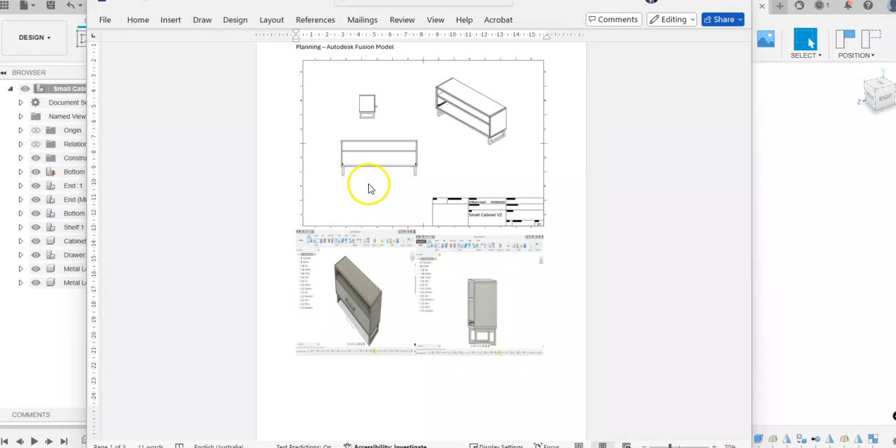This is the same model. You can see it's been rendered out with a shadow and materials, and I've screen clipped this into nice clear images that actually communicate what our design's about.

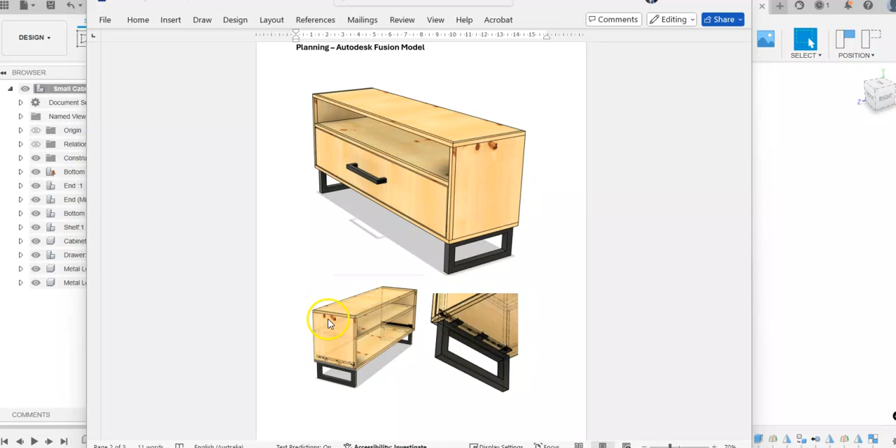The underneath side shows how the legs fitted, and here you can see through the model, like an invisible view which shows all the joinery inside. The technical drawings communicate all the measurements needed, and the exploded view shows the parts view. I've got a few missing here, but we'll go through this together. You can see that communicates much better than initially what's put in the folio.

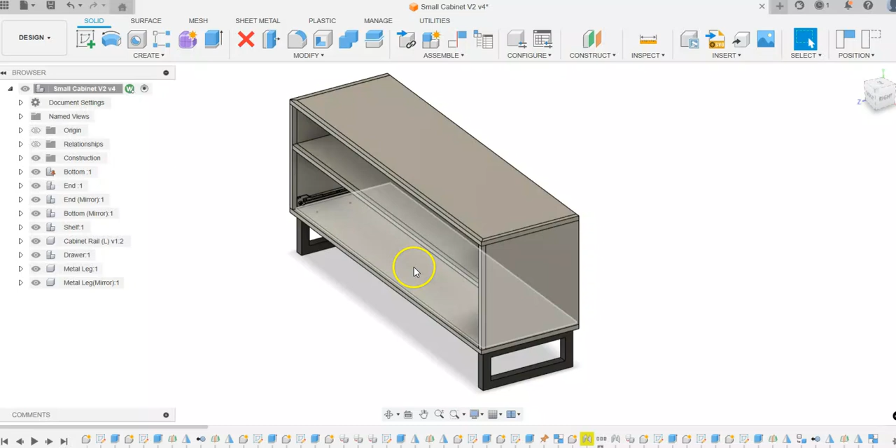So I've opened my project in Fusion, and the first thing I'm going to do is allocate my materials. The natural material that Fusion allocates is steel, so I'm going to highlight everything using Shift and go right-click Material Properties, Physical Materials, and drag my pine over onto the other components.

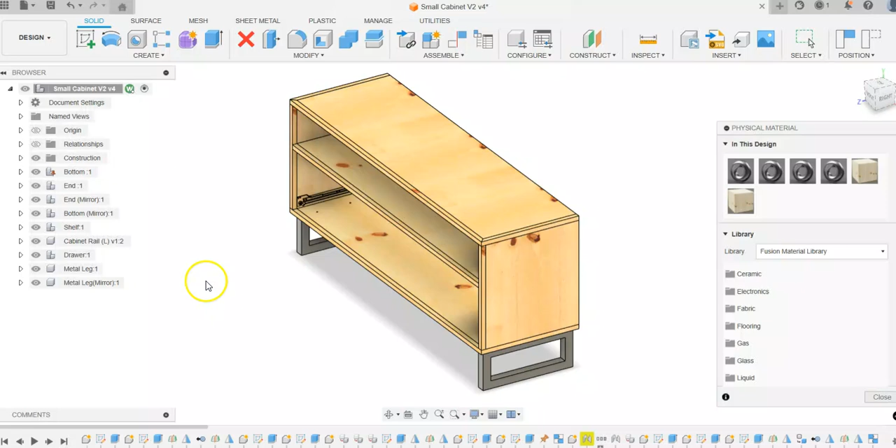I'll just show you that again. We highlight everything we need. If you don't have timber up here, scroll right down to wood and then keep scrolling down to pine, and then click and drag that across to the work.

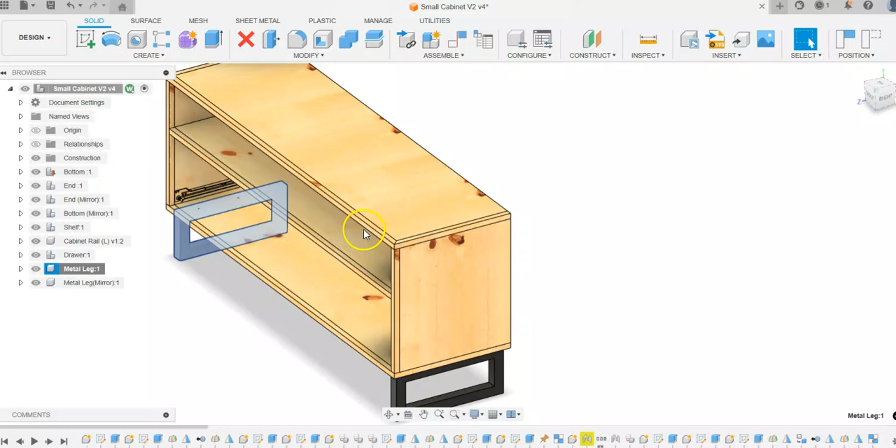Click OK or close to that, and anything that's metal or steel here, we can click on the component and right click, go to appearance, because we might want this to look like a paint finish. So we'll go to paint, glossy, black, and drag that across to the steel components you want.

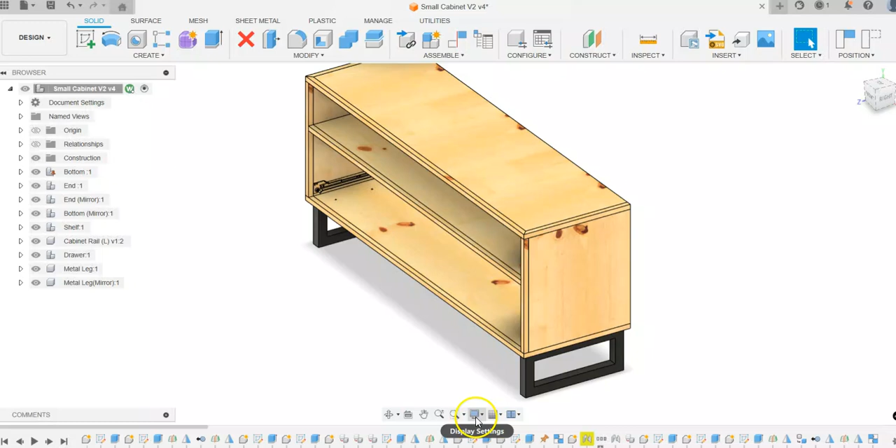I've got draw runners in here, but we're not going to worry about that at the moment. I didn't model this, I got it from a library, but I've just allocated it as timber. Let's not worry about that. The next thing we're going to look at is this display setting down in the bottom.

If I go into camera and change it from orthographic to perspective, you can see that it's a more natural perspective look. That is much better to communicate your style of project.

The other thing you can change is visual styles. You can have a look at this shaded with hidden edges. You can see that's like an invisible see-through kind of look. That's quite nice at communicating the form as well.

If you've got any of these joint markers, that blue one, you can right click on it and go hide, or down here you find which is highlighted, right click and show or hide to remove those markers.

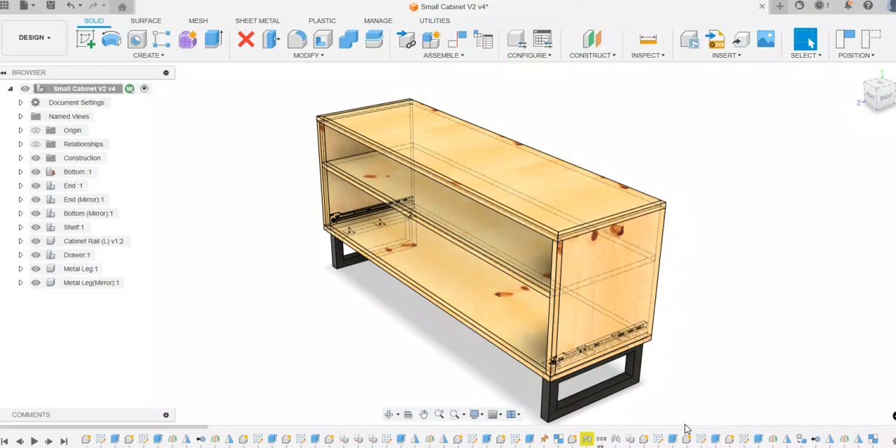On a Windows machine, I click Windows Shift and S, and use my screen clipping tool to screen clip that out. Try and get rid of all this, just have a white background, so zoom to a point where you'll just have a white background. That will look really neat on your project.

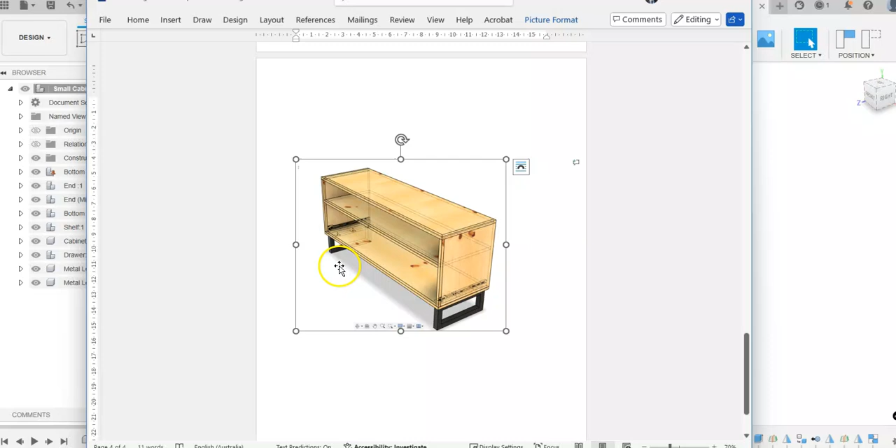So Control or Command V puts your project in. Like I said, get rid of these little icons as well, and make a feature of this, because that is all your hard work that you want someone to assess now. So have it showing the best you possibly can.

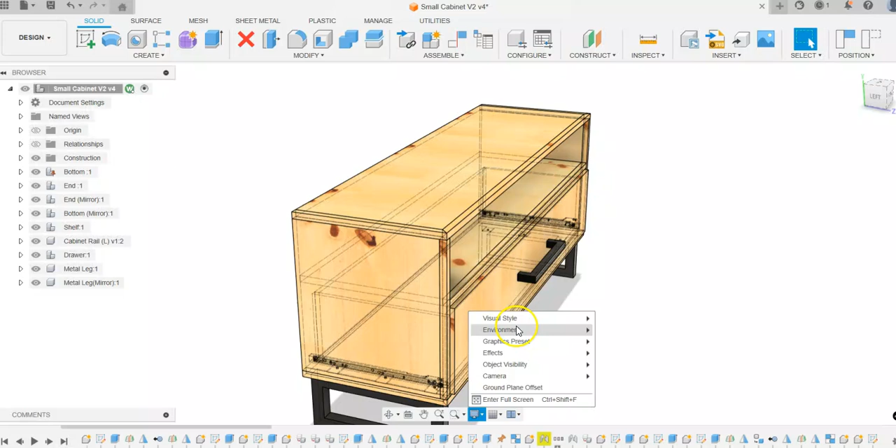I've modelled up a drawer for mine too. Get a few different angles, make sure that it's maybe 4 or 5 of these. I don't really like that form without the outside line, but in visual styles, this one here and this one here, just with the visible edges, that looks really nice.

Let's move now to technical drawings. We're going to go up here and go New File and New Drawing from Design. This normally is a little bit laggy, so be patient with your computer.

Make sure you've saved your work. Give it a good time just to even do it on a reset when you first open the software. Mine was pretty quick today.

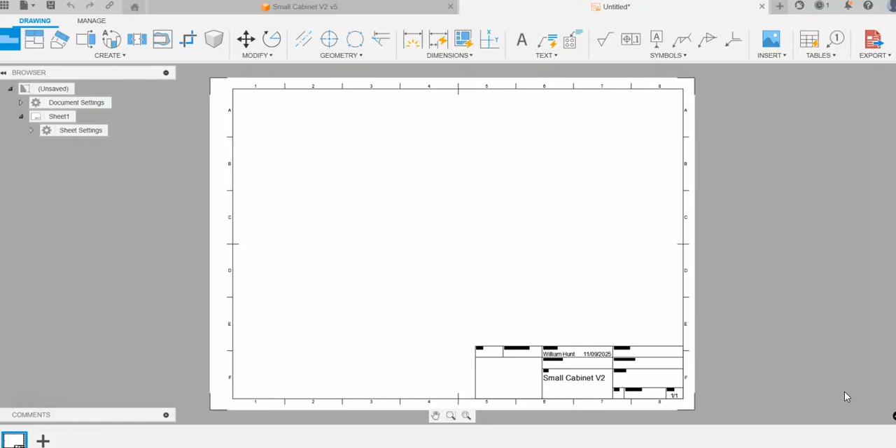First thing we want to do is present a front view of your cabinet. So if it doesn't come up with the front here, you might need to choose left or right to see your front. It doesn't really matter what it says as long as the project is looking at you.

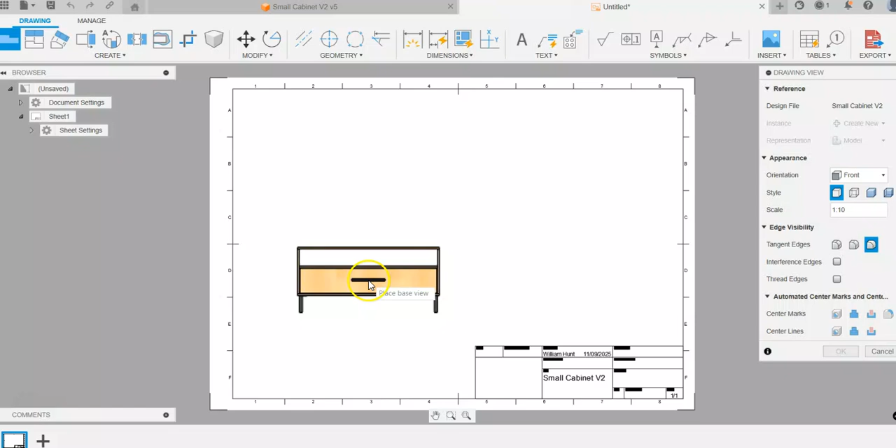I'm going to change mine to 1 to 10 because we want to fill like that quarter of the page there. So we're going to click there and click OK.

Now I'm going to project my views with this button up here. Click the front view, project upwards. That should be your top view, so make sure it's not looking at the bottom. This is the side view, and up here is the 3D view. So that's where we want it to look.

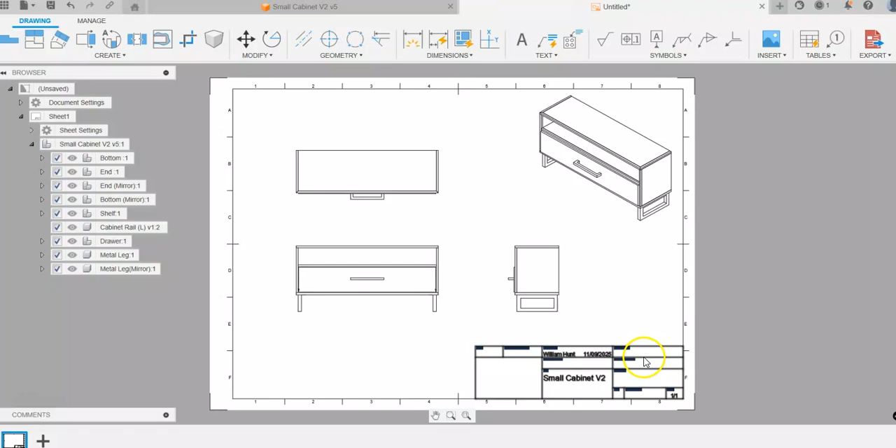I'm going to hide my drawer by unticking this selection here. I want to make my technical drawing like that. And double click this one and make it shaded.

And now we have to present our dimensions on this. Up the top here, we're going to go to the dimensions, and we're going to go from left to right and up here.

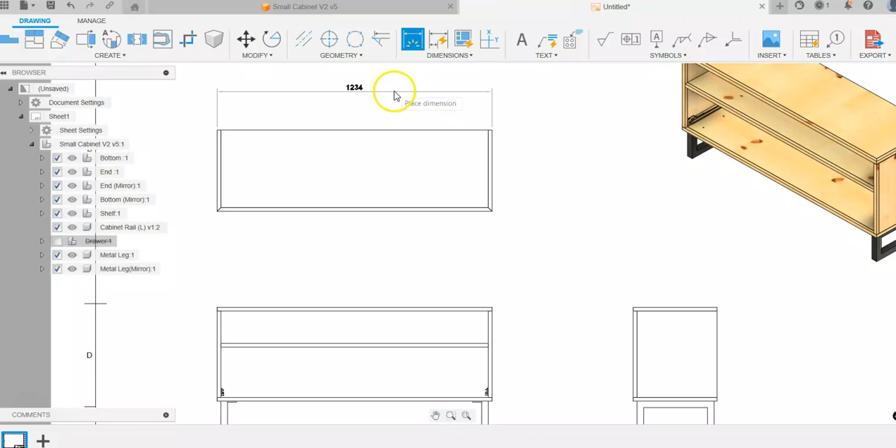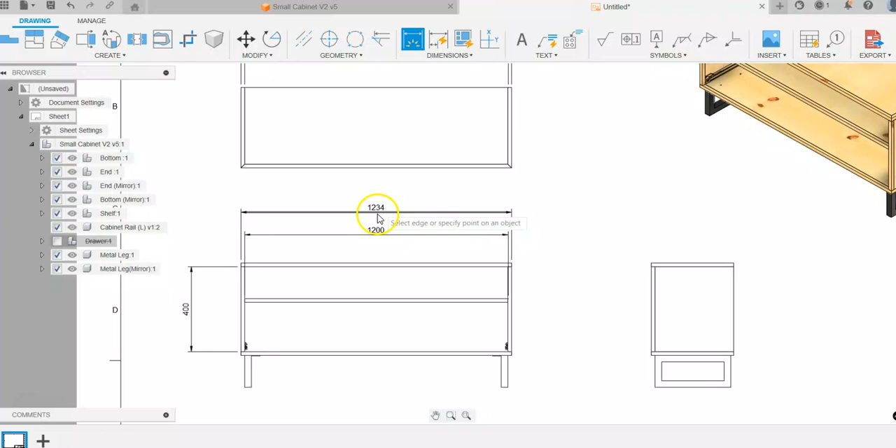And just like we're making a sketch, but this time we're defining every measurement we need to make this project. So take your time and think about what do I need to know about this model to make it in the workshop.

Try and stack the larger dimensions on the outside and then any smaller dimensions inside of that. Things like this here, we can do a little offset of how far away that is, but I'll be dragging that down kind of to here, and then potentially putting this one sitting on here. You can see how that overlaps.

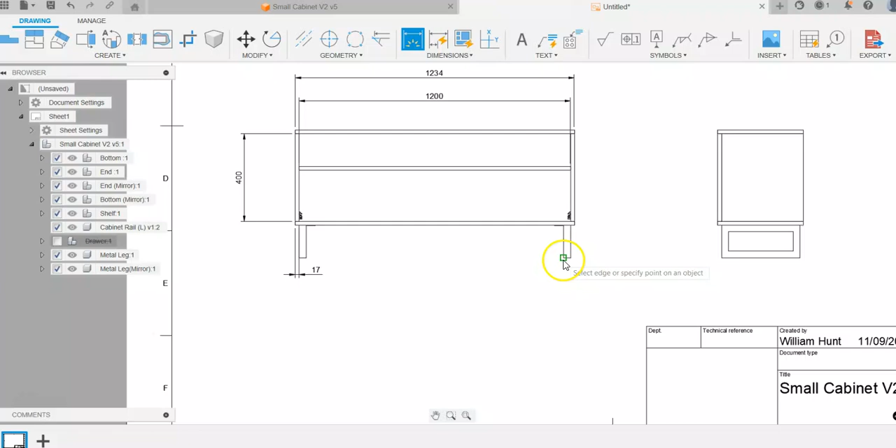I'm going to delete that and try the bottom here for that metalwork. So we could break this down into several different parts, but you can see what I'm doing here. We can get a lot of measurements in that you could take this into the workshop and make it from.

So continue on and get that dimensioned up. So that's looking pretty good. I can read most of the dimensions. There's a few like that will double up. So this one here, 377, you don't need that on this way as well. It's the same dimension. So we've defined that.

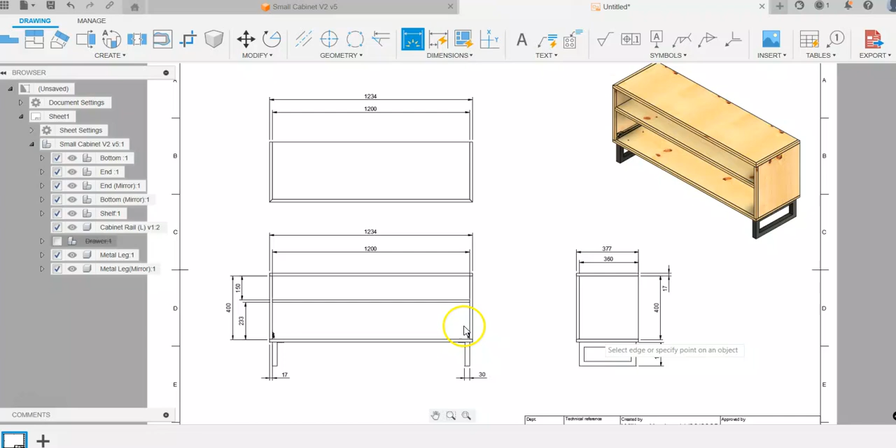There's this tool here which is called the detail view. If you have a detail a little bit like this that you could make larger, we can bring it across to this side and create a bigger scale for this one. So let's say 1 to 5, and then that will give us more room to put some dimensions for this.

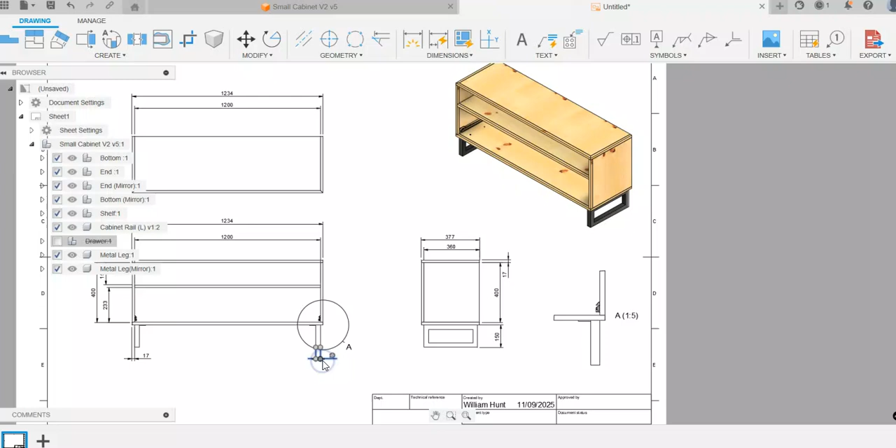We can move the tag around if that's in the way, and now I can delete this and put it on here as a nice clear dimension. We can say the offset here. So try not to double up our dimensions.

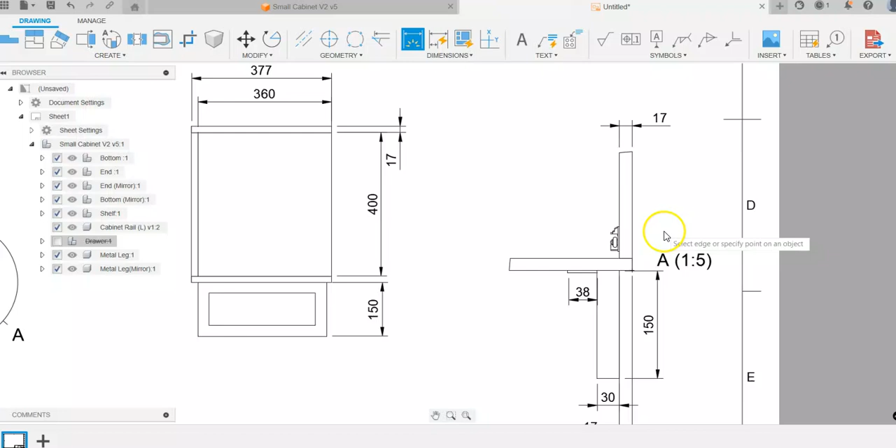We've got that little bracket there, and that looks about it. We could put this measurement on here. I'm going to move this label around so it makes sense. It's a little bit messy.

I'd like to move this one to that side, maybe the 30 down, and try and stack this one up here a little bit more. Just try and make it look as neat as possible.

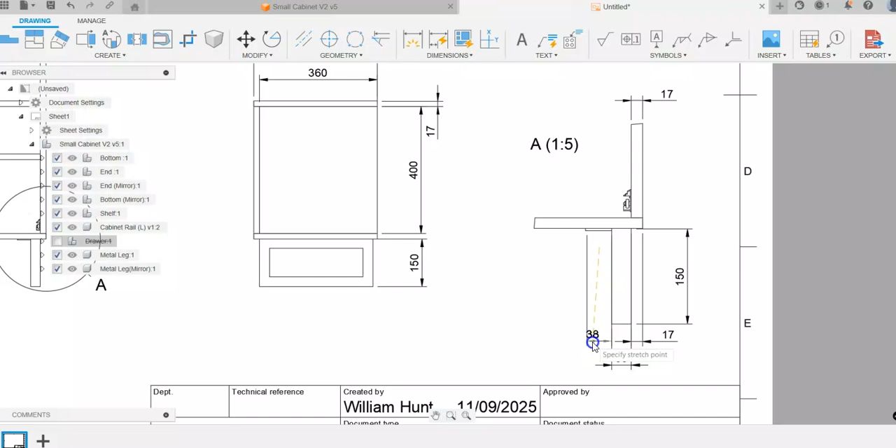Okay, I'm happy with that. So that's got most of my dimensions on. Just neaten it up. Next thing I want to show you is, you can see the way I'm zoomed now.

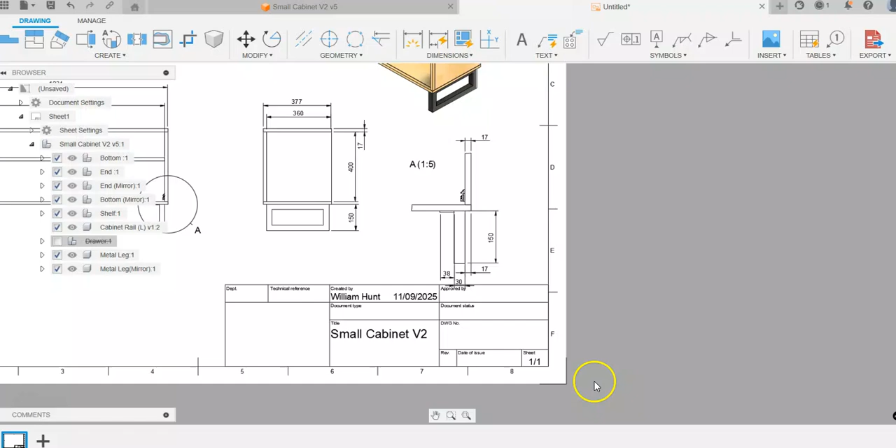You can't really see the graphics really well. So if I zoom into a certain point, all this detail in the title block shows. You want to make sure when you screenshot this that nothing's overlapping there. So just do a little tidy up. Make sure you can see all the details.

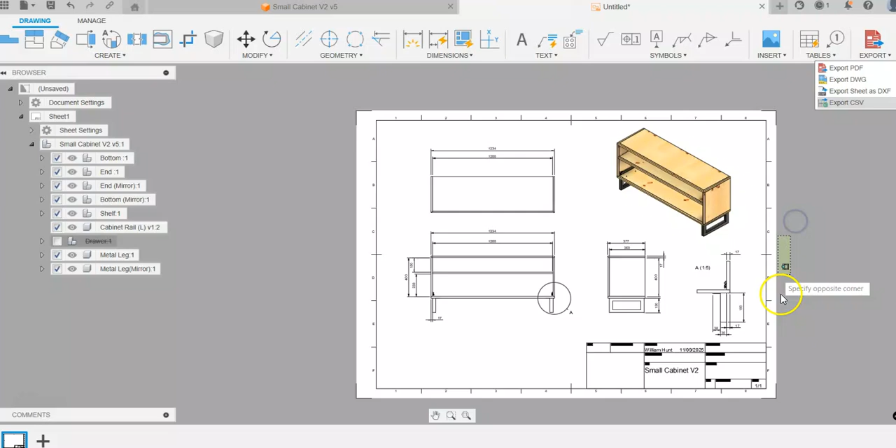If your graphics in your computer is not working too well, try and export it as a PDF, and then you'll get a much clearer view to screenshot into your final projects.

This is looking pretty good to me, so I'm going to go Windows Shift S. I'm going to try and get this whole page. Oops.

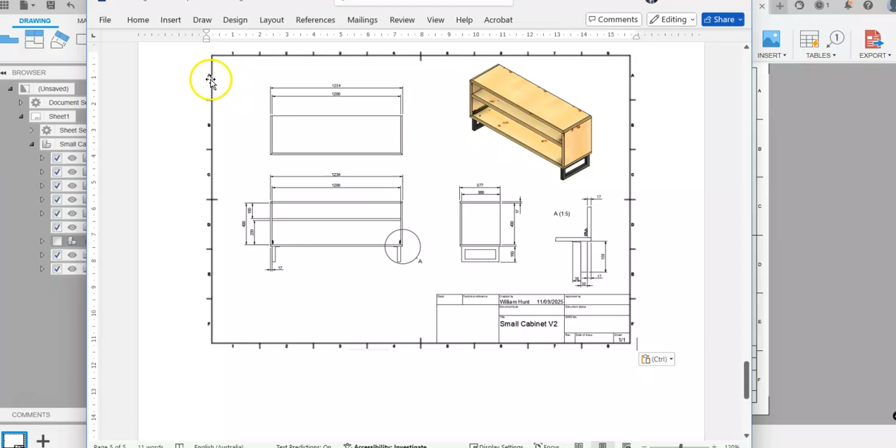And then we can paste it into the folio. So you can see it's nice clear text. For some reason this has gone a bit highlighted and bold, so I might want to try that again.

The next thing I'm going to talk about is the exploded view. This is the final one I'll show you. So looking a little bit like this with the parts view and the parts table.

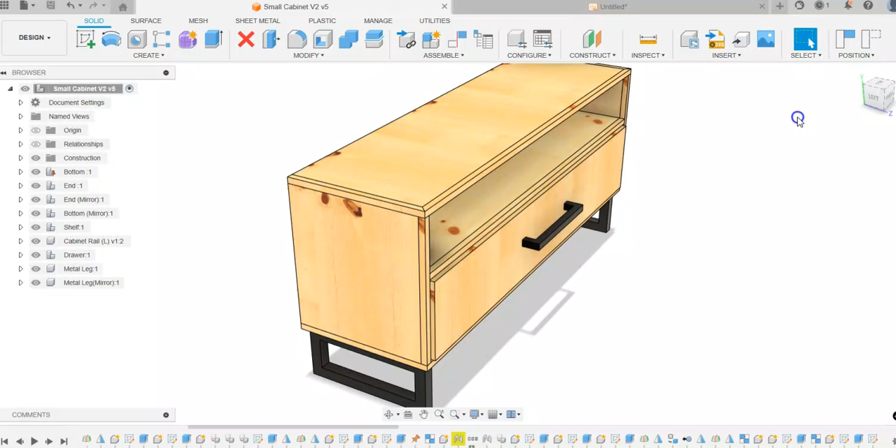We have to go back to the model. So this is my model. I'm going to go to the home view, so the little house here, and we're going to go into the animation view. I've already given this a go, so I'm going to go to another new storyboard down in the bottom corner.

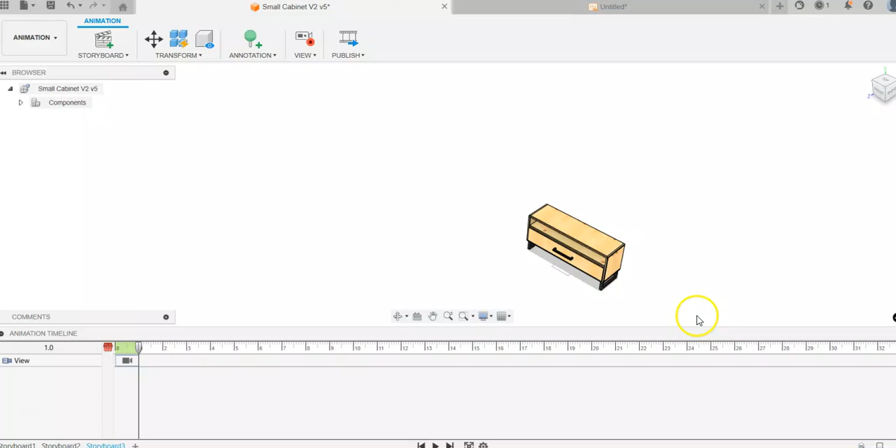When you first open it, yours should look like this too. Go to the home view and then zoom out a little bit. To make this simple, I'm going to hide the drawer, so I'm going to get rid of that.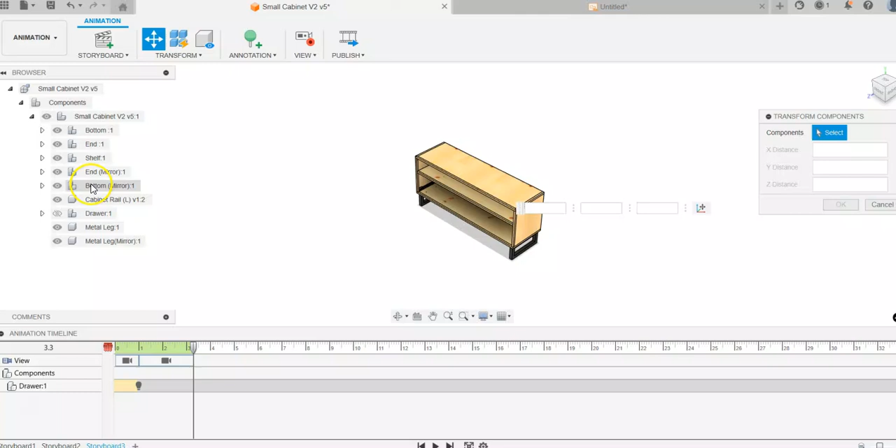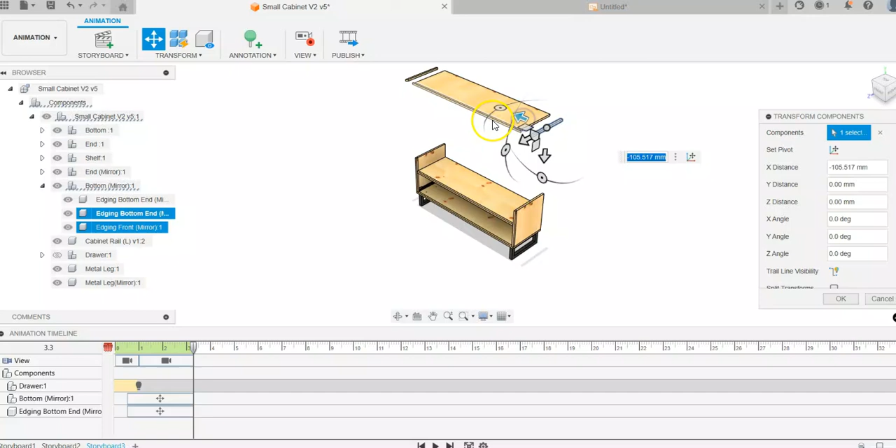I don't know why the top's called bottom in this. It's called a bottom mirror, so it just depends how we made this. So that's going to come up like this, and then I'm going to expand and look at the edging now. So that one's going to go out. This edging is going to come out this way, and it's just about stepping everything out so it's got a bit of clear space around it.

So that one's going to come out that way. This one will come this way. I'm going to move the drawer down - sorry, not the drawer, the base down. This one here can come up a little bit. We want to see that kind of space around everything.

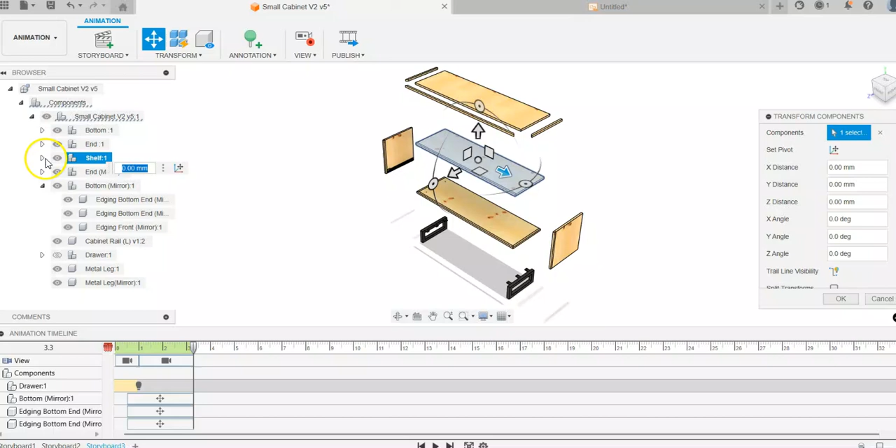We can go to the next level and pull this edging out just a tiny little bit, and this one a little bit. We know this connects to this side, so this is the bottom, so that comes out. If you can try and be fairly logical with the way you split all these pieces apart, go out a little bit further than what you think you need to.

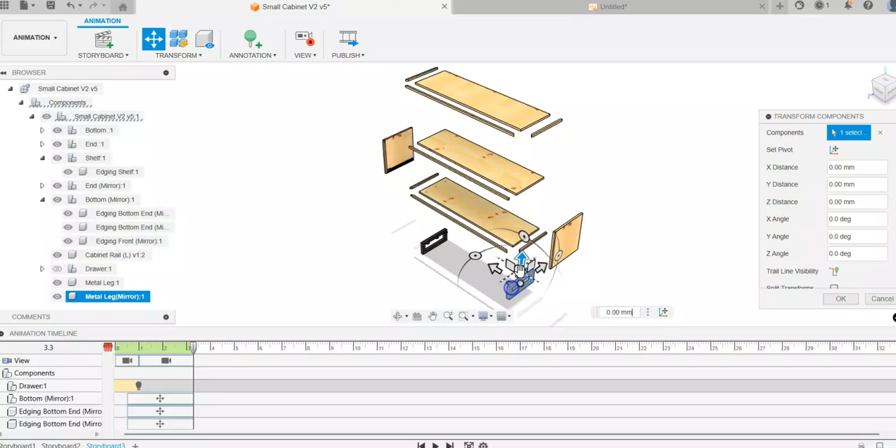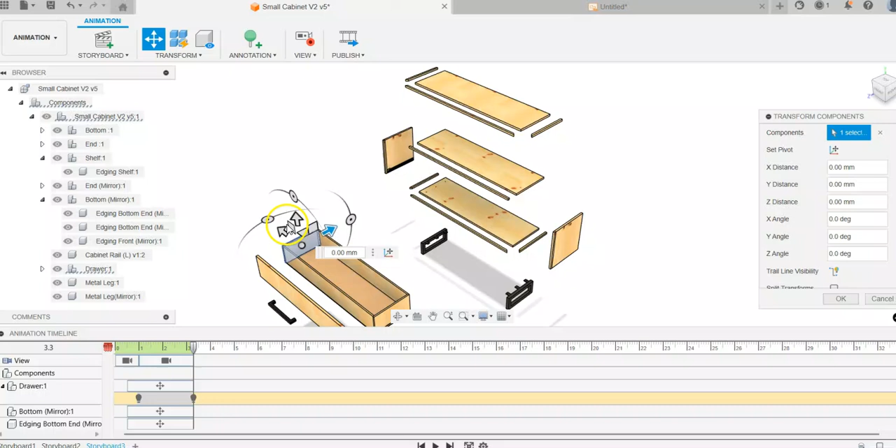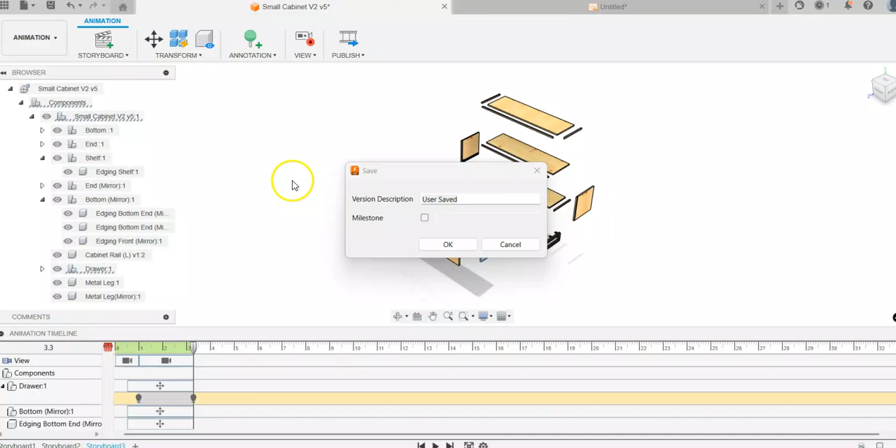I'll see where this drawer sits now, so I'm going to get that full drawer and move it out, and then I'll move these individual components of the drawer. So it's not difficult, it just takes a little bit of time. Now that's not completely apart, but let's just call it that for now. And we'll click save up here and just give it a little bit of time to think about that before we do the next process.

Alright, now we are going to go to new drawing from animation. We'll click OK to this. Remember, this is where your computer could stall a little bit.

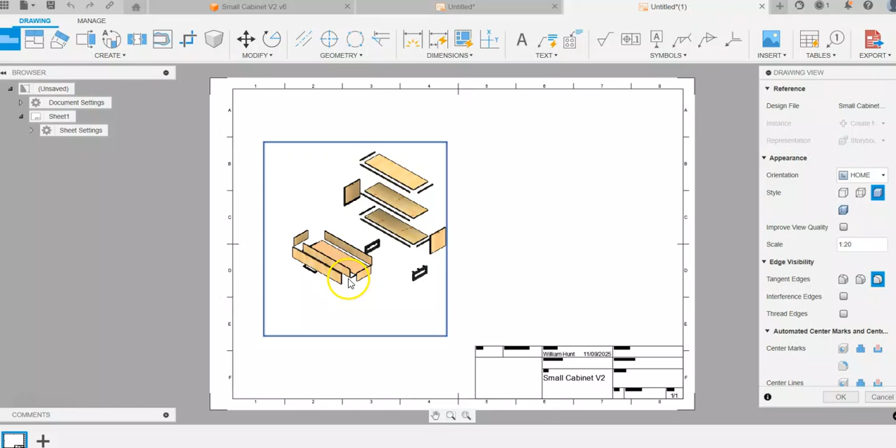Okay, mine's coming at a fairly good scale. I'd like this drawer kind of part to be a bit further out though, so I've placed that in that position, and we can always go back to the cabinet. This is where it sometimes takes a little while to think about it. We'll select the full drawer and bring that out.

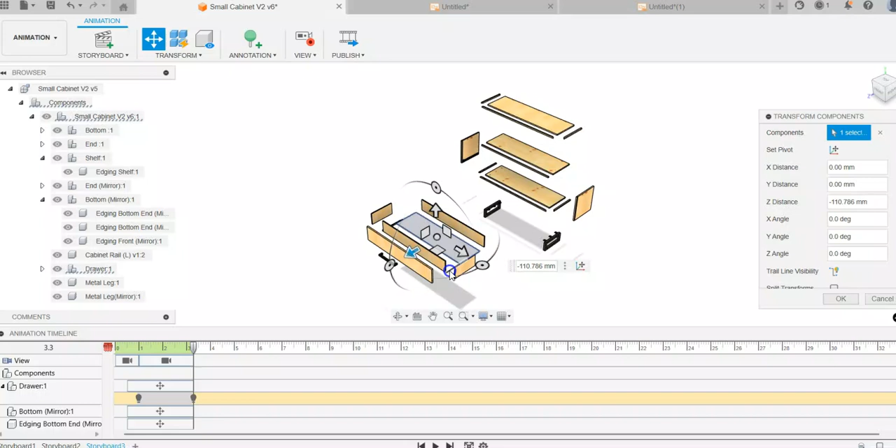I'd spend a bit more time separating this if I wasn't in such a hurry to get this video sorted, but just do your best to clearly define each component and get it to look like it's just kind of exploded apart. Think about that kind of like a Lego kit instruction. You want to have that kind of look that it would all snap back in together.

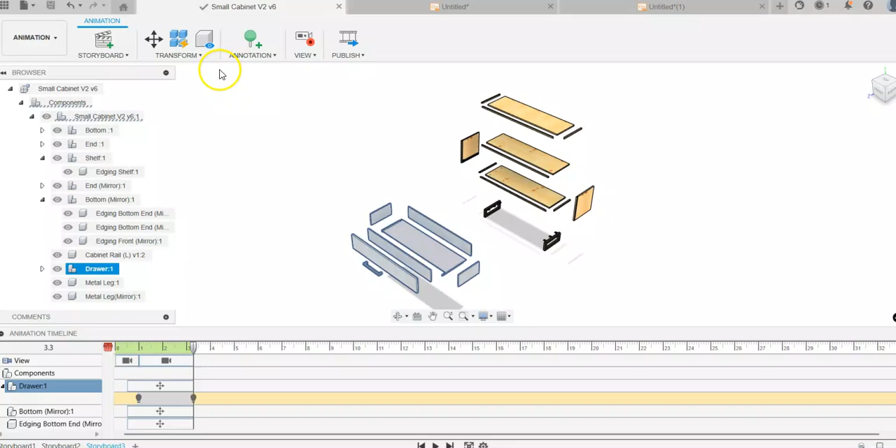I'm going to save that work again, give it a minute to think about it. We'll come back to the file that we just made. It gives me a warning that our model's been updated, and then I'm going to click this little update button up the top, and it will update to how you've placed your work. Once we've got that in, most of the work's done.

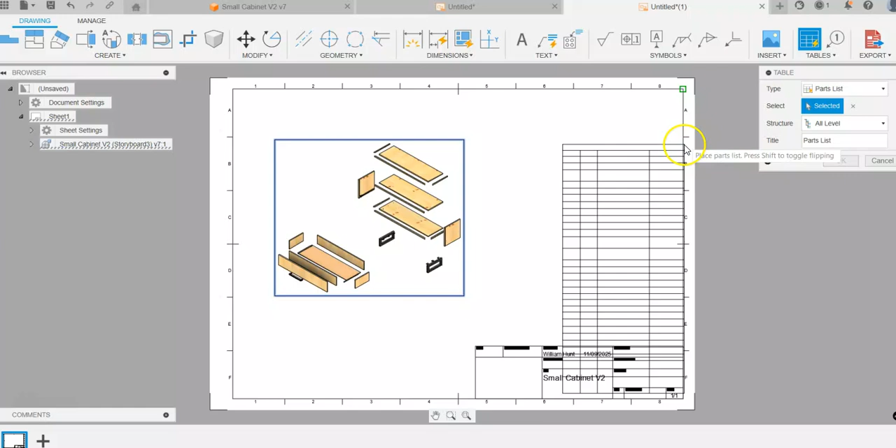We're going to go to table. I'm going to go down and select all levels from the structure. You can see that has expanded that table out, and there is a lot of different components here and the materials that we've allocated to it.

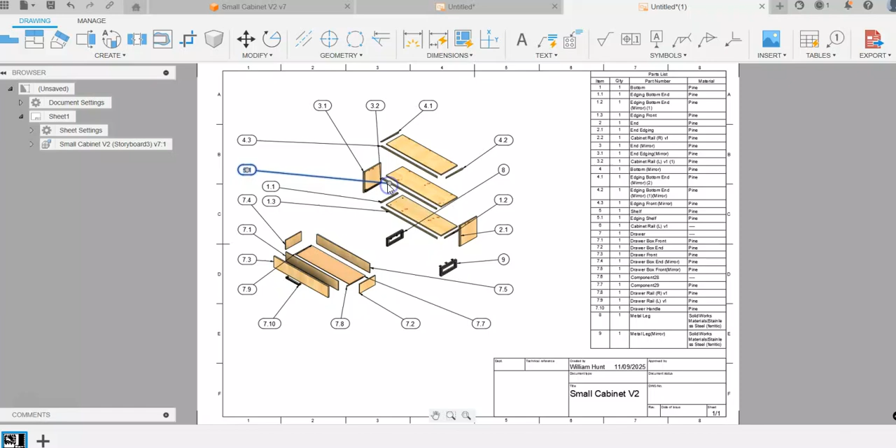Now your job is to click once on there and then bring it around so we've got no crossovers of all these components. So it takes a little while to organize, but trust me, it will read much better if we can try and get these in some kind of order that kind of looks like it doesn't cross over. So I'll pause this video, I'll get this one organized, and I'll show you what it looks like in a sec.

Okay, I've arranged that fairly well. You can see they're kind of arranged in lines. Where possible, I've got rid of the overlap. There's a couple in here which was a bit tricky, so as long as you're minimizing that.

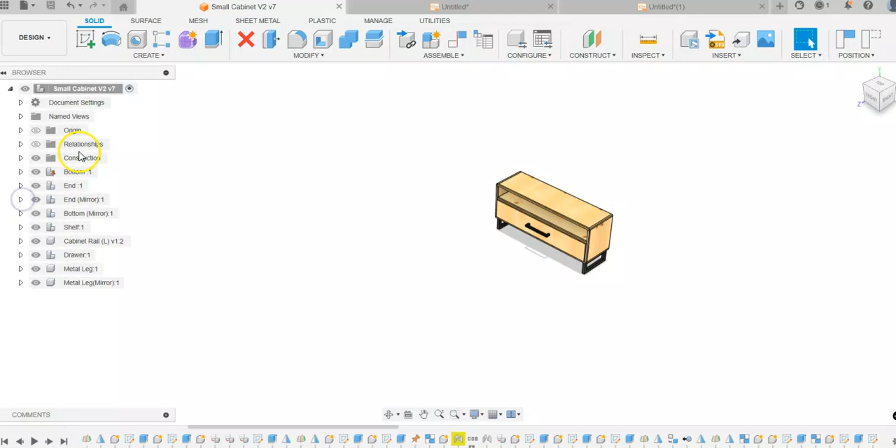All the names here of all your components, they're related back to this model here. So if you go right back to your design phase, you can change these model names and the sub names inside of here. That's what you have to do before you save that work and then save and update this model. That would update these names.

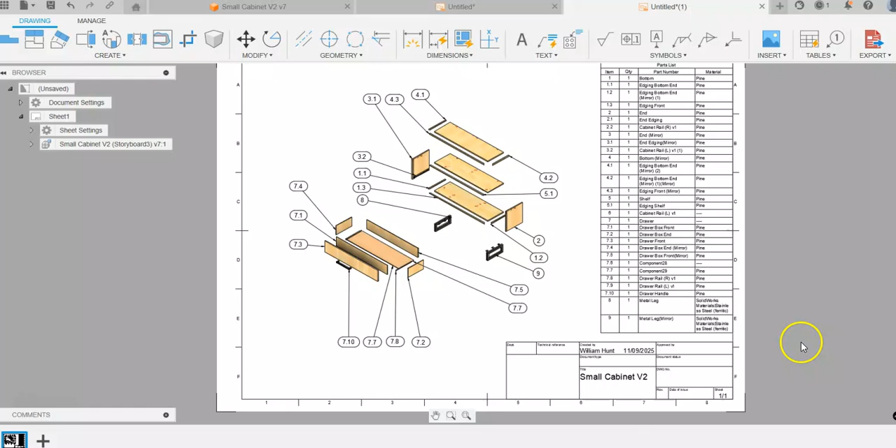So if you're having trouble with that, last piece of advice here, just make sure that zoom is kind of enough so you're not getting the pixelation in here. Zoom it nicely, arrange your work, do your screenshots so you're maximizing what your project looks like.

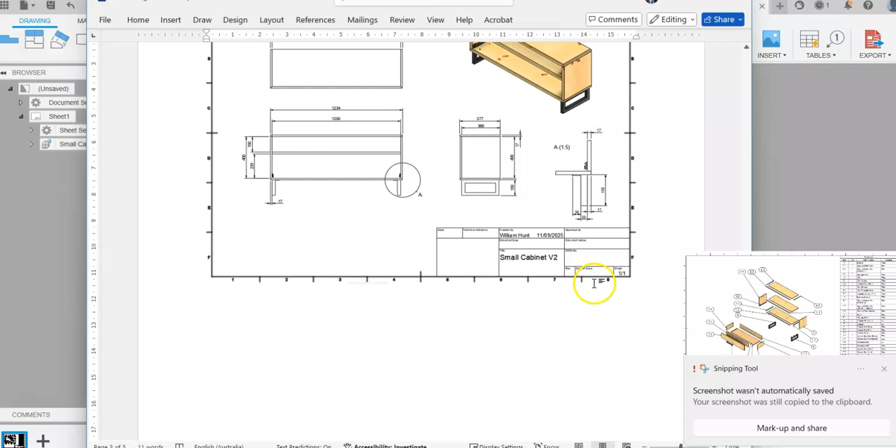And I missed again, here we go. And that will look really great when you go back to your Word document and paste it in. But just remember, the whole point of this video is you've done all the work for the model, so display it really nicely in your folio.

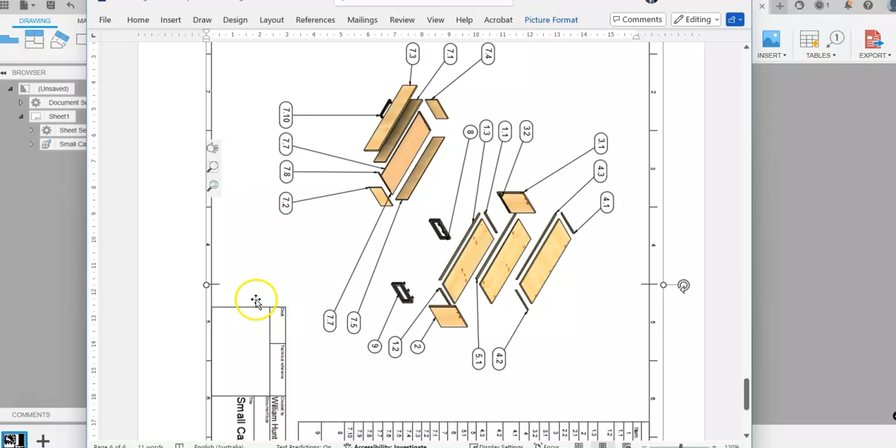I wouldn't be opposed to actually making these full page too. So just put it like that, and then make a page, fill your page out, because then when whoever's marking this will look through your folio and it will look just like, you know, that's a solid piece of work there, and much of your planning grade is going to come off of this.

Hopefully that's been helpful in the presentation of your folios.